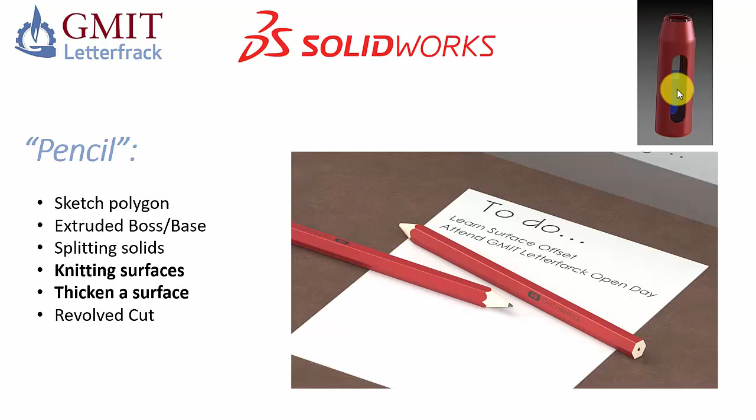The main goal of this video is to explain how to knit and how to thicken surfaces. To do that, we're going to focus on drawing one of these pencils, but we'll also quickly draw the water bottle that you see in the top right hand corner of the screen. So let's begin.

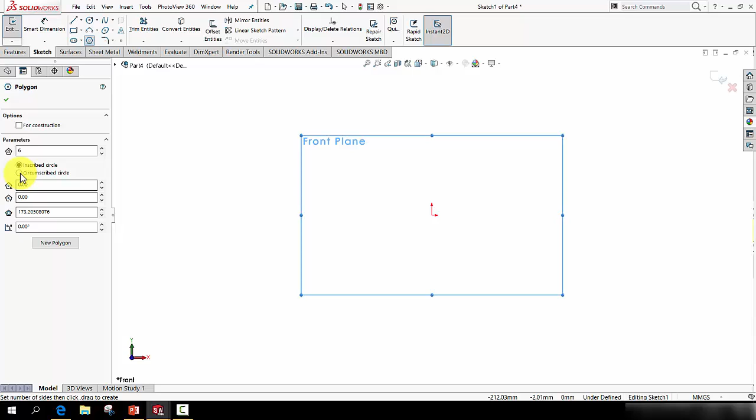Moving over to SolidWorks, we're going to begin drawing the pencil by calling up a sketch of a hexagon or a polygon and select the front plane to begin. Hit the space bar and normal to. Make sure that 6 is entered in the number of sides and draw the polygon.

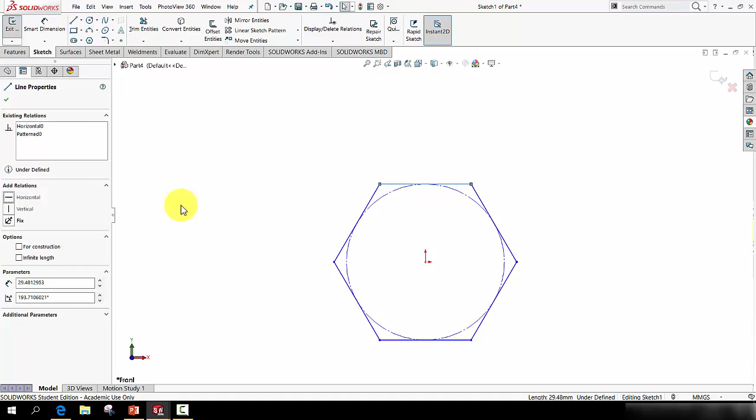I tend to always draw it at an angle on purpose because it very rarely snaps to being horizontal. At least now if I tap escape to clear the command, click one of the lines and actually force it to be horizontal, at least now I know it's horizontal. I'll use a dimension to set that top value to 8mm, and finally I'll ease all 6 corners with a sketch fillet. Let's try a radius of 2mm and see how that works.

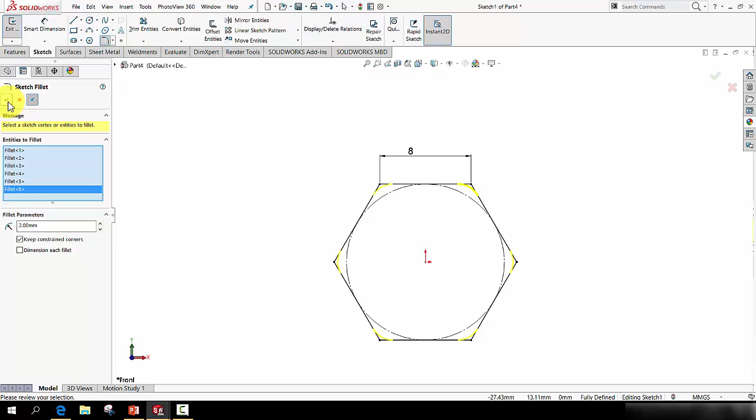Works good. So once that's applied, press this green tick to close the sketch fillet. Select this green tick and then close the sketch. So to make the main solid of the pencil, let's apply an extruded boss base feature to a value of 250 and press the green tick to approve it.

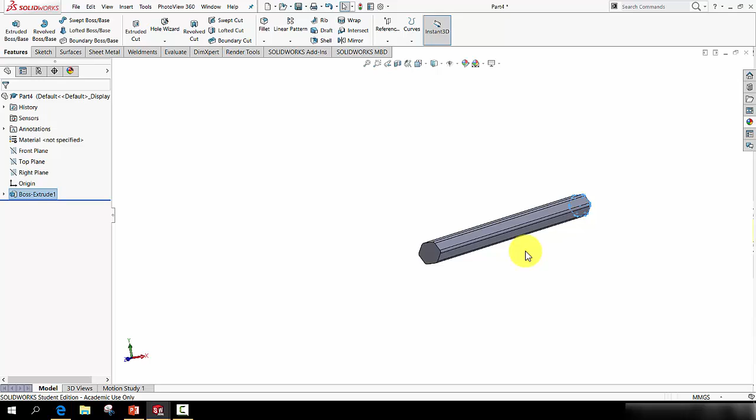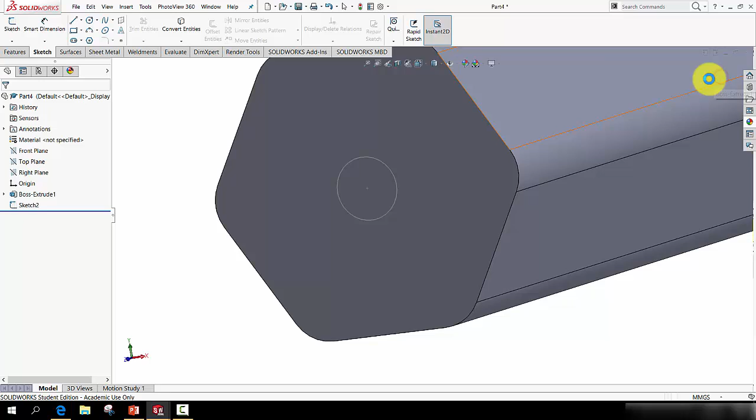Now I want to split out the graphite or the lead within the pencil. So to do that, I'm going to select this surface, start a new sketch of a circle centered at the origin and dimension that to a value of, let's say, 3mm. Close the sketch.

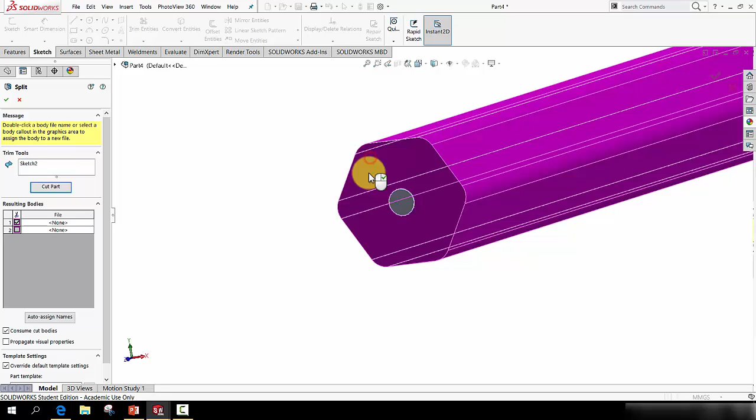I'm going to use that circle as the split tool to split out the center of this solid and make a graphite afterwards. So to do that, insert, features, split. If it's not already selected, select that circle as the trim tool and select cut part. Confirm both solids by clicking them. Click the timber, click the graphite, and just make sure that consume cut bodies is selected. Press the green tick to approve it, and now you can see in the folder called solid bodies, you've got 2 separate bodies which you can hide, edit, or manipulate individually.

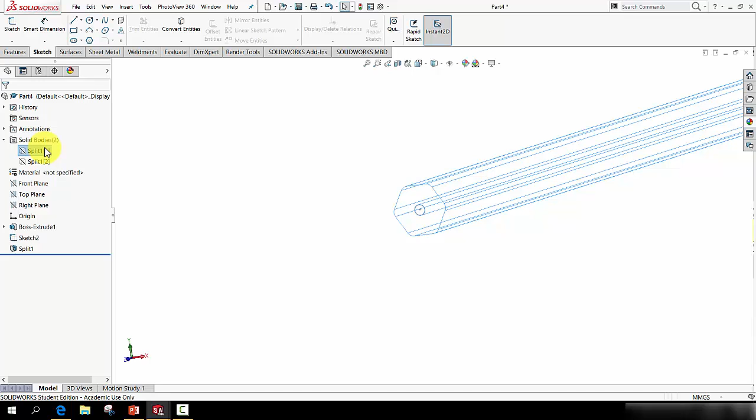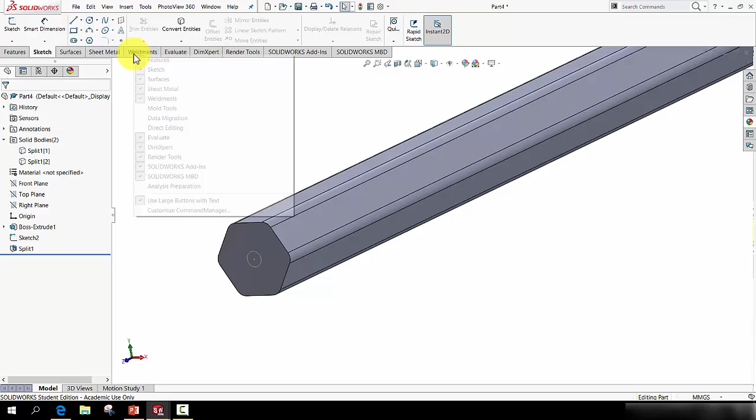So let's turn those back on. Now what I want to do is apply a coat of paint all the way around this. There's a number of ways of doing that, but I'm going to use a surface knit and a surface thicken. If you do not see the surfaces tab here, simply right click any of the other tabs and make sure the tick is turned on beside surfaces.

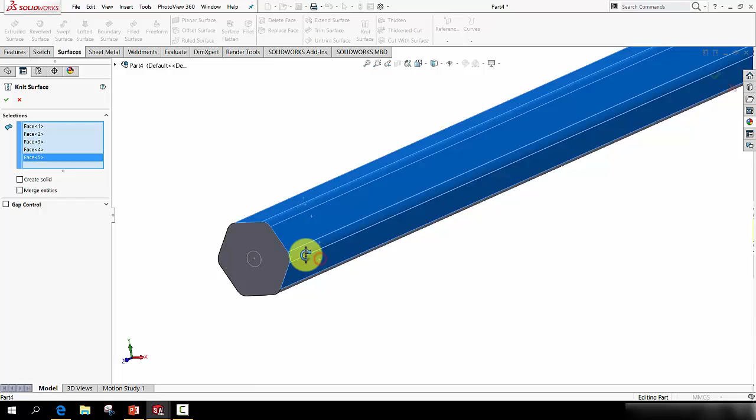Activate the surfaces tab and let's create a surface from the existing faces around the pencil. To do that, select knit surface and make your way around, selecting each of those faces in turn. Make sure not to leave any of them out. And there we have it. Pressing the green tick now will knit all those surfaces together and create a new surface. It's in this surface bodies folder if you're looking for it. There it is, surface knit 1.

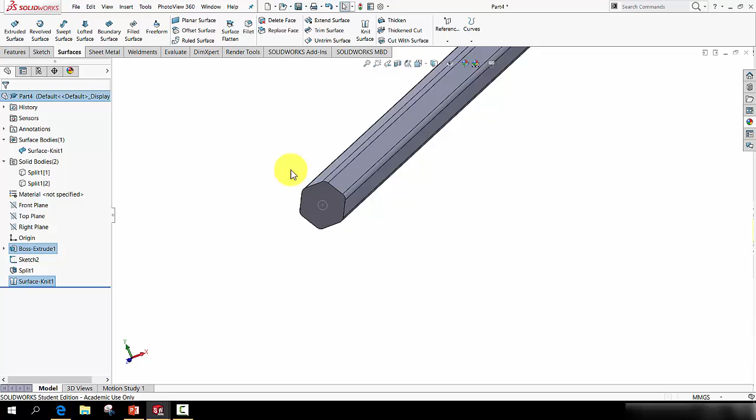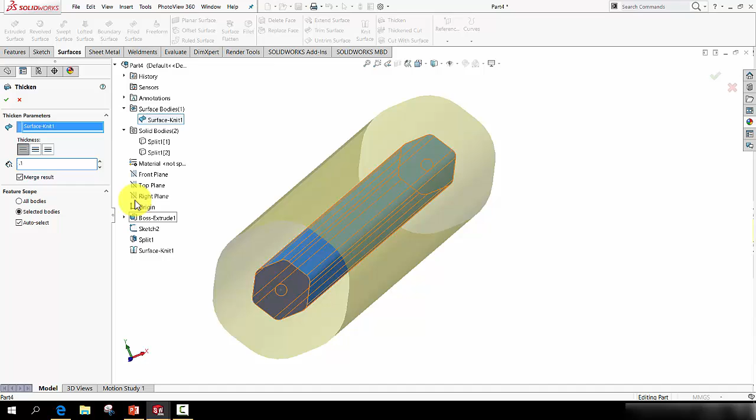But that surface knit 1 sits on top of the outer surface of the pencil, but it has no thickness. So let's give it some thickness. If you go to thicken, then select the surface knit, you can see here it's trying to thicken it out by 10mm, which is obviously too much. Let's just put a very thin coat of paint on it, so set the value to be 0.1 of a millimeter. If it happens to go the wrong way, use these 3 options to send it in, out, or mid-plane. Press the green tick to approve.

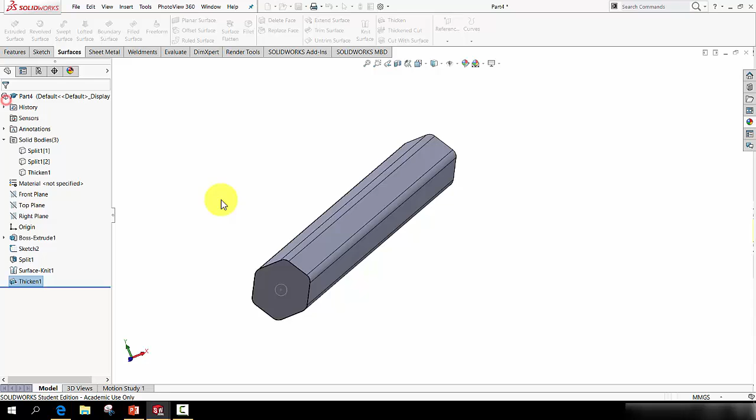Before I do so, I don't want this coat of paint to be the same material and the same solid as the pencil inside, so I'll just deselect merge result. Press the green tick, and there you have it.

Now to better see what we have, what I'm going to do is apply some material appearances. So let's put plastic, high gloss, red plastic, drag it into the surface and make sure I apply it not to the face or the part but to the body.

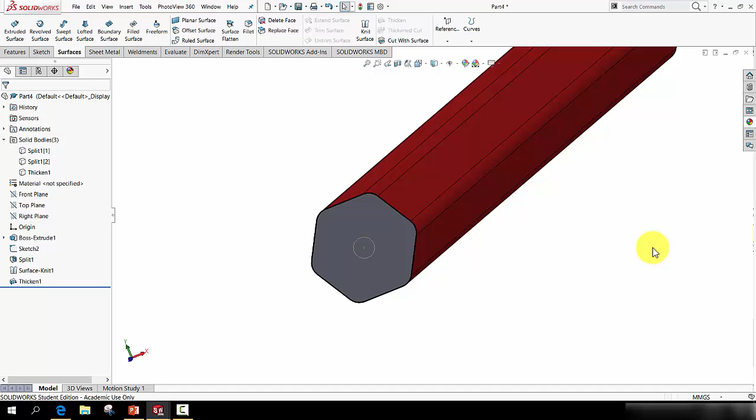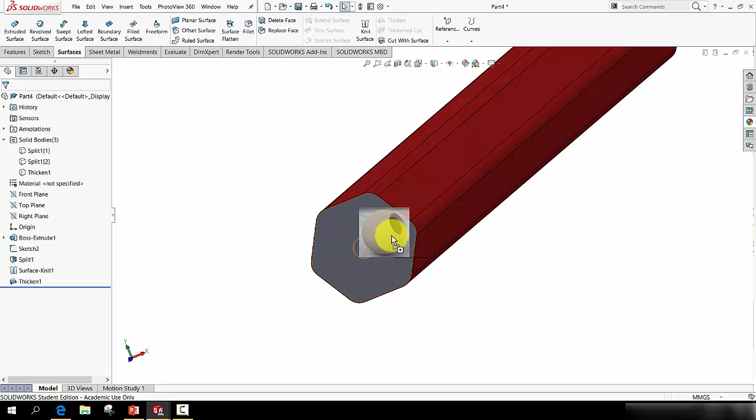I'll then look for organic and wood and pine, and typically the timber in a pencil is not varnished, so let's use unfinished pine, and what I'm going to use here is end grain, so unfinished pine, end grain. I'm going to put that onto the whole body for now. I may need to change that later, but for now it will serve its purpose.

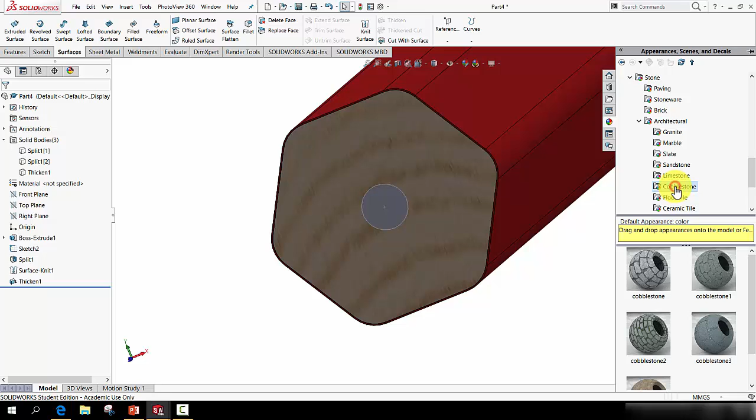Finally, they don't actually have graphite, so I'm just going to pick something that looks a little bit like it, and I'm going to go down as far as stone, and let's look for limestone or even cobblestone, or slate might work best. So drag slate onto that body, and there we have it.

So finally, just to top the pencil, what I will use is a revolved cut. I'm going to start a sketch on either the right plane or the top plane. Let's say the right plane.

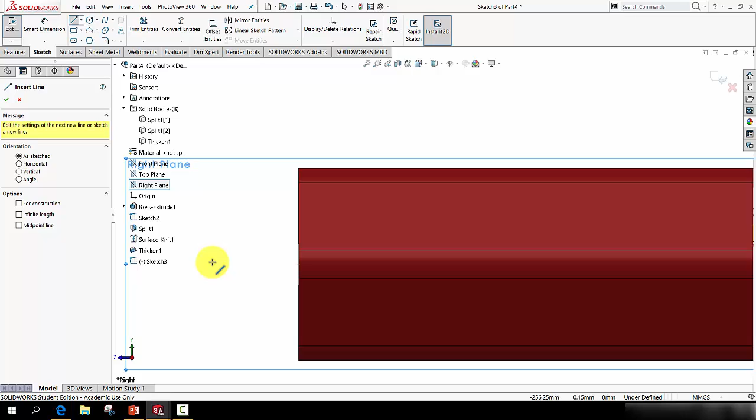We'll start a sketch of a line, and I just want to start somewhere along the middle, right there. Come up at an angle of your choice and make sure you clear it. It's not good enough to start there, you need to clear it a little bit. Come across horizontally and make a shape like that, a triangular shape.

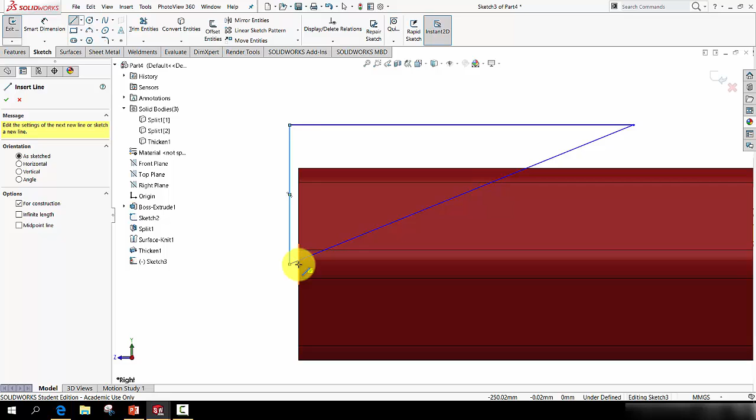I also need an axis of revolution, so instead of a solid line I'm going to use a center line and snap that onto the center, placing it anywhere there for now. This more than likely will throw up an error. You can't do a revolved cut with the point sitting on the axis of rotation, so I'm actually going to drag that away a little bit.

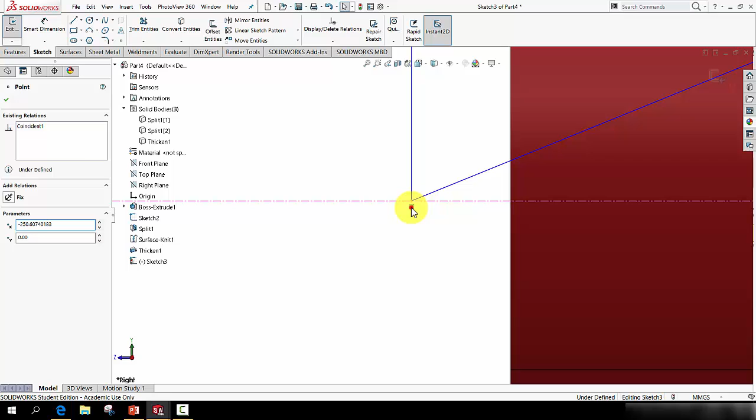Now as it happens, it won't allow me to drag it because this green constraint is there, so if that appears, just click it and press delete. Now I should be able to drag it up a little, just leaving a little gap there. To save time, I'm not going to bother dimensioning this, but there's nothing to stop you adding an angular dimension here, for instance, or some vertical or horizontal dimensions. I'll just put on an angle of 20 degrees for now.

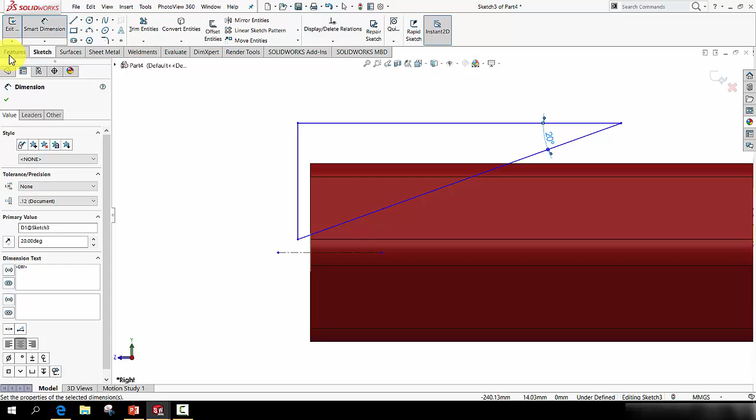When you're happy with that, go to Features, Revolved Cut, and just make sure in the options that all bodies are selected. You don't want to just remove this from the paint or the timber, you want to take it from everything, so select all bodies. Press the green tick, and there you have it.

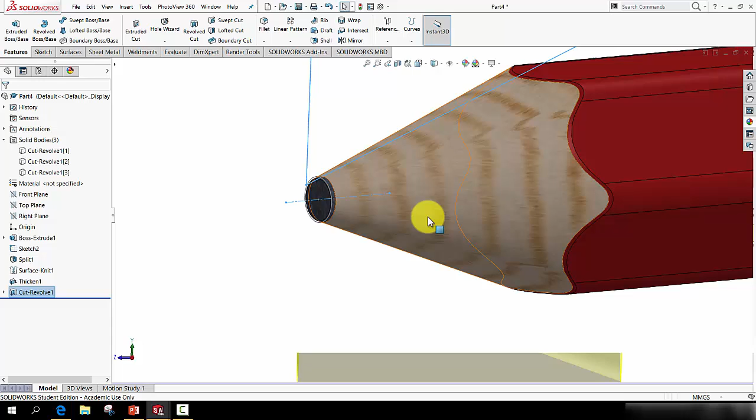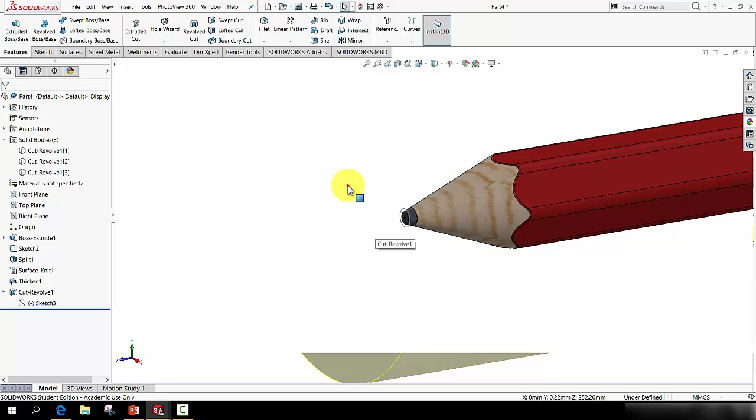Now I'm going to make one slight edit to that. I want the pencil to be a little sharper, so I can just drag that sketch. If it's not visible, you can select it within the cut revolve feature itself. Right click, edit the sketch, and let's just bring that a little closer like that, and you can refine the point of the pencil like that. And just that sketch is still visible, so let's hide that sketch over here, and there you have it.

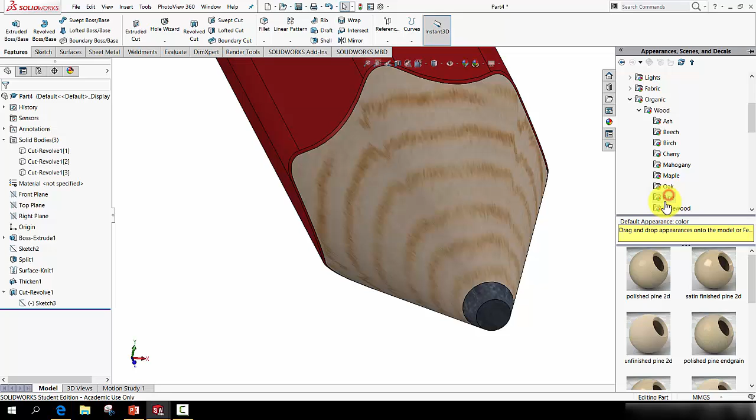Now while I'm here, I can see I don't necessarily want that end grain there. It doesn't look bad, but if you wanted to change that, you could get back in here to organic, wood, pine, and just put unfinished pine onto the face. In fact, it nearly looks better the other way, so I'm going to leave it. So there you have the pencil.

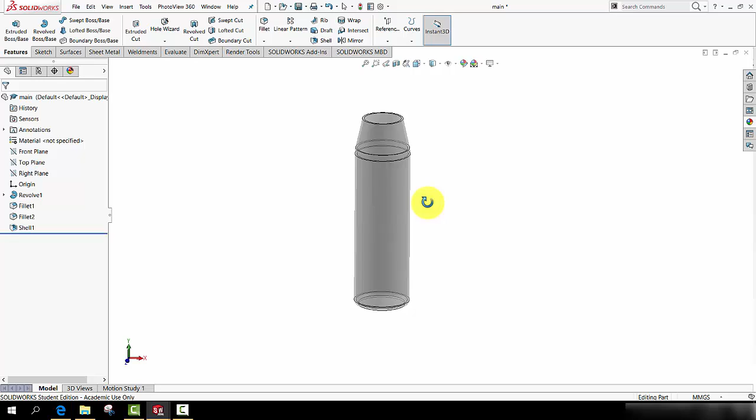Now here you can see an example of a very simple container. It's a water bottle, drawn with a simple revolve feature, with a couple of fillets applied to it, and hollowed out with a shell. So what I want to do is put a rubber grip that perfectly sits around that. Now this is a simple solid, but this technique works for even the most complicated of solids.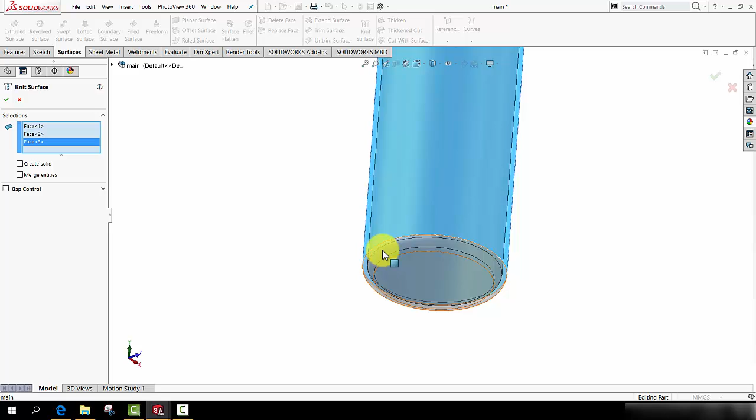So like we did with the pencil, let's go to Surfaces, Knit Surface, and select all the outer faces and turn those into surfaces. When you have them all selected, press the green tick to approve, and now we have a new surface body, Surface Knit 1 in this case.

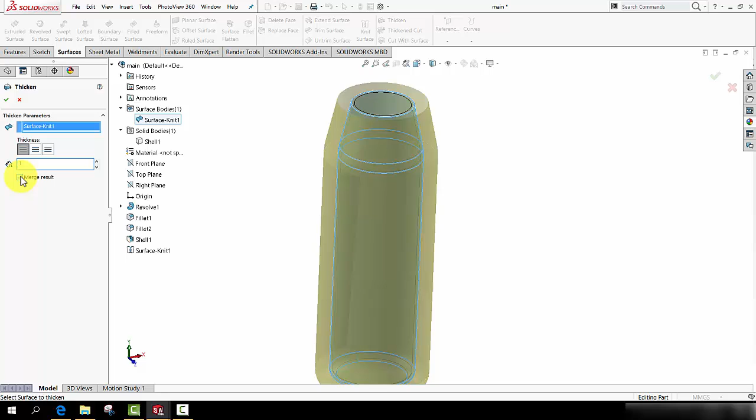We will now use the Thicken command and select that surface, and let's thicken it to 1 millimeter. Press the green tick to approve it, but before doing so, deselect Merge Result, and there we have it.

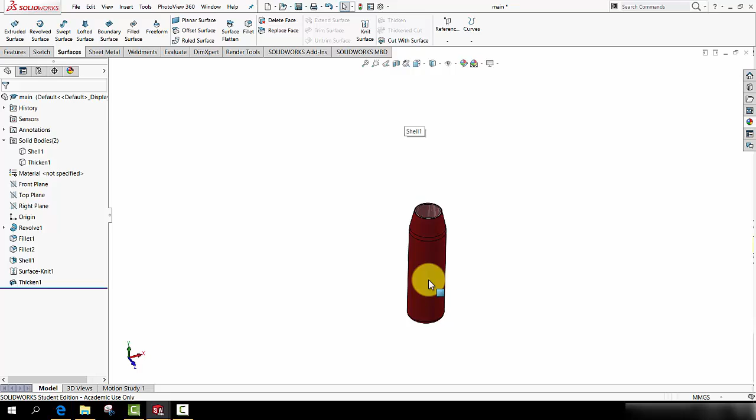So what I'll do now is apply a material appearance of, let's say, plastic, low gloss, and red. Drag and drop it onto the body, not the part. So you can see inside I still have the clear plastic or clear glass, and outside I've got the skin tight rubber grip that fits perfectly around it.

So let's hide the first solid. In my case it's shell 1, the glass inside. Right click and hide, leaving me just with the outer rubber grip.

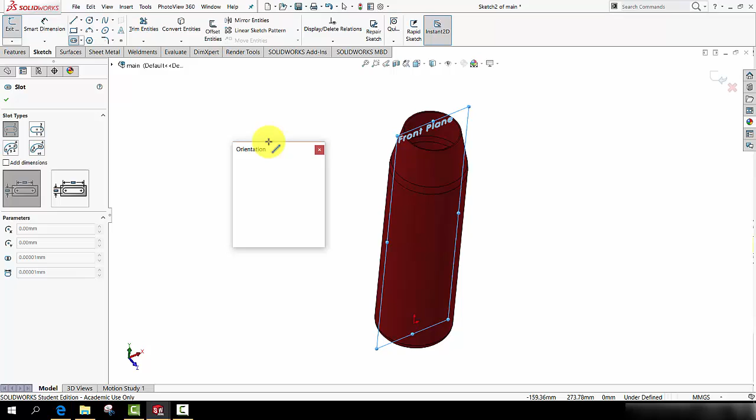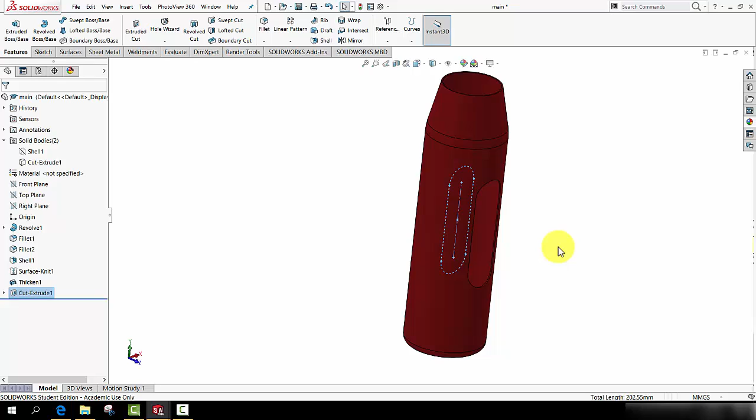If I now draw a simple sketch that cuts some windows into this water bottle, just so I can see how much liquid is inside it, you'll see what happens. Features, extruded cut, this sketch, and mid-plane. Now you can see it does what I expect, it's going to cut a couple of windows in this plastic rubber gripper.

But because the water bottle itself, the clear plastic portion, was hidden while this is happening, you can see when I turn it back on, it has not removed that window, nor has the extrude cut feature been applied to the plastic bottle itself. So that's a very useful way of getting parts that need to interlock or have other surfaces or bodies wrapped tightly around inner ones.